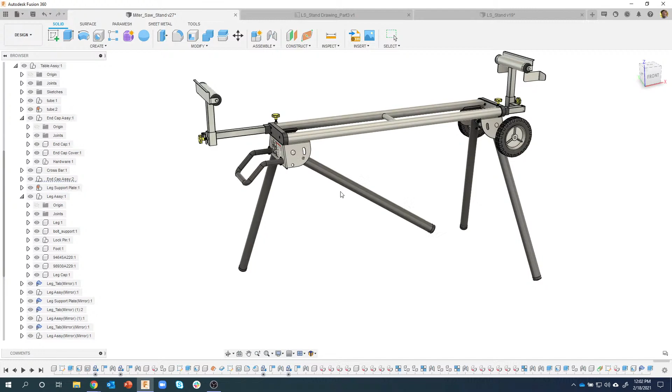We're going to continue today using the miter saw stand we've been working on. We're going to work on this leg assembly, specifically the whole leg. If I zoom in here, you'll see we've got some hardware - a pin that goes through here with a spring, and we're also going to work on this slot. The last live stream in this series, we created this sheet metal part, but we left out this slot, so we're going to show you some cool tips and tricks on how to do that.

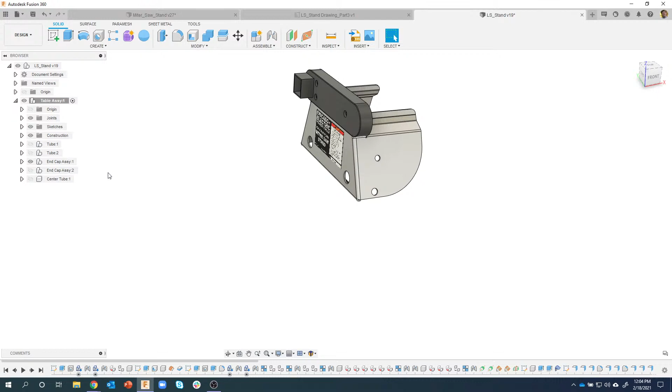I've shown in the past you can come into the assemble menu and say new component, or click on this icon and say new component. But my favorite thing to do is right mouse click in my structure browser where I want that component to be - I want it underneath this table assembly. So I'll right click and say new component. You can't really see what's going on, but this parent says one selected, so it knows the table assembly is going to be the parent, and this component is going to go underneath that.

So I'm just going to call it leg. Pretty unoriginal. Okay.

We'll create a sketch. Now in this design, I'm actually creating things out in space and then positioning them into the correct location later. So I just created a new sketch on the top plane. I'll create a circle out here somewhere - doesn't really matter where - and let's do 45 millimeters. Again, this is according to the drawing.

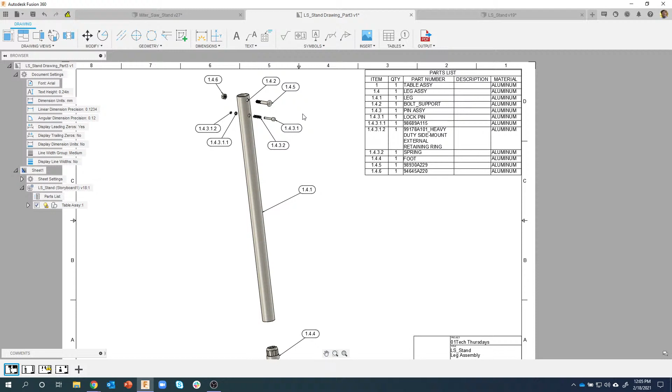So you'll see this is the drawing set - I have an exploded view. We're going to be creating this foot down here also today, and then I have a drawing of each of these. You can see here I forgot to dimension the diameter, so I'll fix that - I apologize, that's funny. And then we're going to do this pin, this lock pin, and we're also going to do this little foot. That's what we're going to be working on today.

Okay, so it's a 45 millimeter diameter. Then I'm just going to extrude this.

And I've shown this tip before - I could say finish sketch, but if I just click on my profile and right mouse click, I'm going to do this first extrude. The second extrude is a surface extrude, so you typically don't want to do that. So I'll do this first extrude, and you'll notice it finishes my sketch for me, so I don't have to click finish sketch and then click extrude. We'll go minus 820 millimeters according to the drawing.

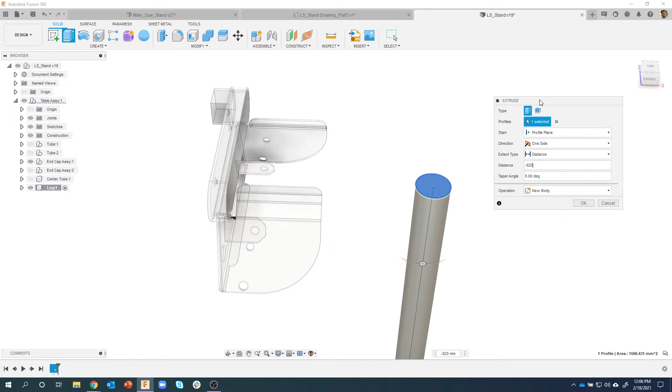Now we recently added this thin extrude, which I really like. So instead of having to shell this part out or create multiple circles in my profile, I can come in here and say I want to do a thin extrude, and it's going to ask for the wall thickness. In this case we're going to do 2 millimeters. When I say OK, it's like it shelled it out for me automatically, and I didn't have to select the top face and the bottom face like if I had used the shell command. So, cool little tip.

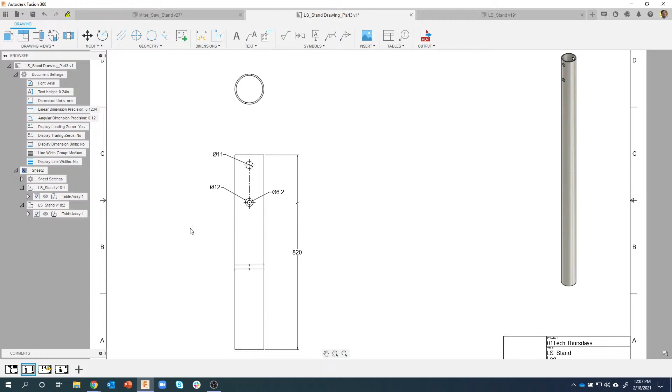Okay, the next thing I want to do - let's jump back to this leg - is I want to create these circles. And man, I realize I must not have finished this drawing. I didn't even dimension where they're supposed to be. Wow, I apologize.

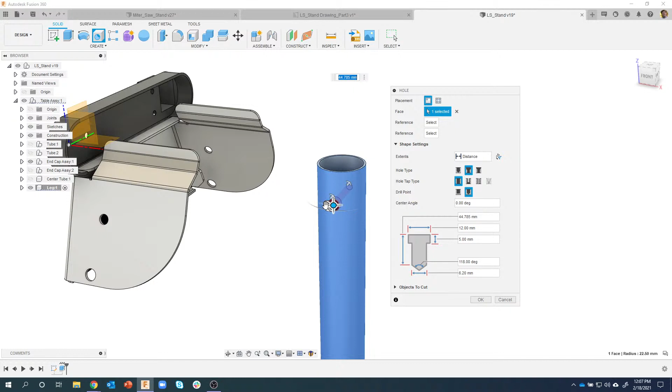Okay, so I'm going to create those two holes using the hole command. I really like the hole command, and here's why: you'll notice I'm not even going to create a sketch, and it's asking for a placement. If I get near the front of this and click off to the side a little bit, you'll notice it actually puts it tangential to that front plane.

So you can kind of see right there. Now if I were to have clicked off to the side a little bit more, over here, you'll see it's going to go tangential 90 degrees from that direction. So I don't even have to create an offset plane or anything like that—it just does it automatically, which I think is pretty cool.

Okay, so I'm going to just click somewhere on that face. The diameter of this top hole is going to be 11 millimeters. Then I'm going to reference this top face, and you'll notice as I hover over it, it highlights. So I'll go ahead and click on that, and it throws a dimension there—basically saying the center of this hole is going to be this distance from that top face.

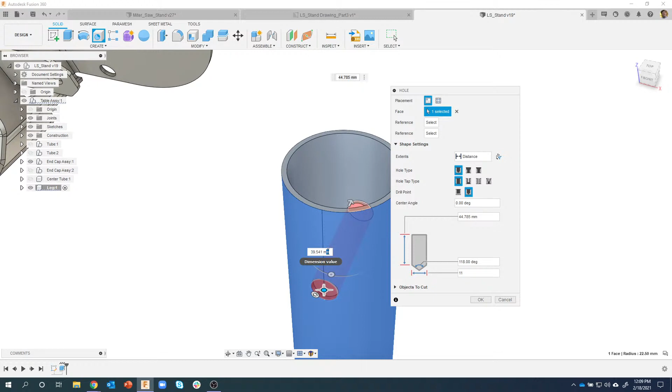Well, I want it to be 15 millimeters, so I'll type in 15, and you'll see that updates and moves that hole to be 15 millimeters from that top face. The other thing I want to do is make sure, instead of a distance, I'm going to just say go through all. In fact, I don't know if you saw that change ever so slightly.

Yeah, notice when distance was set, it wants to do an angled drill—let me look at it from the side. It just picked some random distance. But if I came in and said go through all, you'll see it's going to go all the way through. The drill point really doesn't matter in this case. And I'll go ahead and say OK.

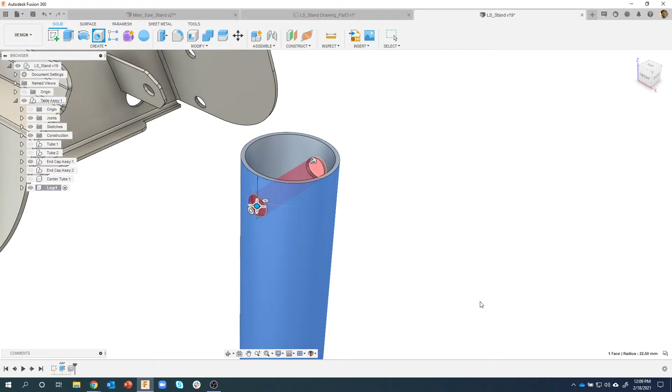Okay, I'm going to create the other hole. That was the 11 millimeter diameter hole. Now I'm going to do this 12 diameter and 6.2 diameter hole, all with the same command. I'll just right click and drag straight up to repeat my last command. If I right mouse click, you'll see this black line—that's called a gesture. Right click and drag up repeats the last command, which in this case was the hole command. If it was an extrude, it would repeat the extrude command, or a circle command, whatever your last command was. So that's how I did that.

Okay, so I'm going to click on this face again somewhere. I'll reference that top face, and this needs to be 71 millimeters down, so we can see that preview. Now, what I want is a larger hole in the front and a smaller hole in the back for this little spring pin to go through. I could do this with two separate hole commands, or I could change to this counter bore, which will allow me to give a diameter here and a diameter here.

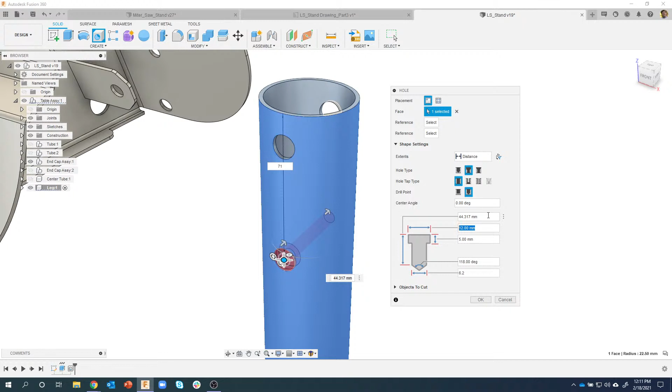So for the through hole, I want that to be 6.2 millimeters, and you can see how the preview updated—that got smaller. And here, this one is going to be 12, so that was actually correct. Then for the depth, I just need to make sure I'm going deep enough that it's cutting through the wall—you can see right here it's set to 5. I could set it to anything really, it doesn't matter, I just want to make sure it's cutting through that wall. And once again, I'm going to say go through all, that way it goes all the way through.

It kind of rotates funny because that's such a long part, but now you can see we're going to have a larger hole here and a smaller hole through the back. So I'm going to go ahead and say OK, and there we go.

Okay, so Al asked a question: can you ask Brad to show what the rotation handle on that hole does?

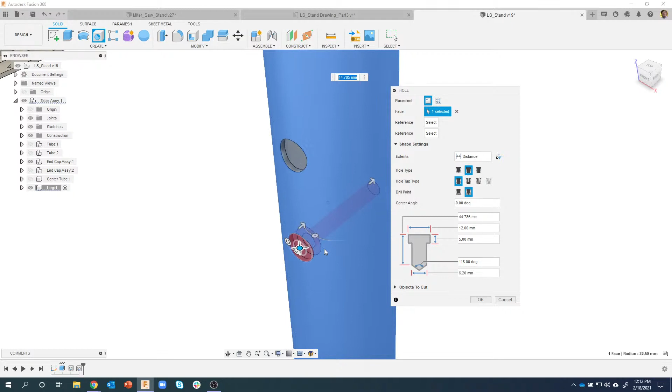So the question was, if I were to create a hole here - you can see it's kind of hard, it's kind of buried in here right now - but this actually allows you, by default, to start at that tangential face, or 0 degrees of angularity. I could come in here and rotate it to whatever I want.

In fact, I could come in here and say I want that to be at 45 degrees. Oops, sorry, that was the wrong one. Sorry, 45 degrees right here. So yeah, great question, Al, thanks for doing that.

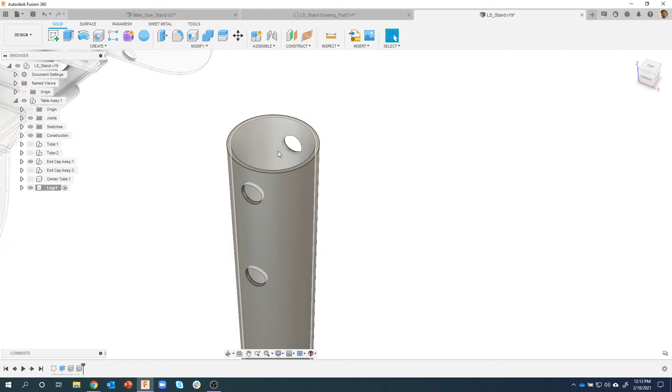Okay, moving forward. So I now kind of have the pipe the way it's supposed to look, but in the actual pipe there is an insert that the bolt goes through. So I'm going to create a new component under the leg.

Now you'll notice here we created this leg under the table assembly. You're going to notice I'm going to create some stuff under the leg because it's kind of all together. So I'm going to right-click here, New Component, and I'm going to call this bolt support. And I now have a new component underneath the leg called bolt support. This will just kind of help with organization.

So what I want to do is basically create an insert, a circular insert that's going to go right here. Now I don't have a flat face that I could create a sketch on or anything like that. So here's a neat tip for this.

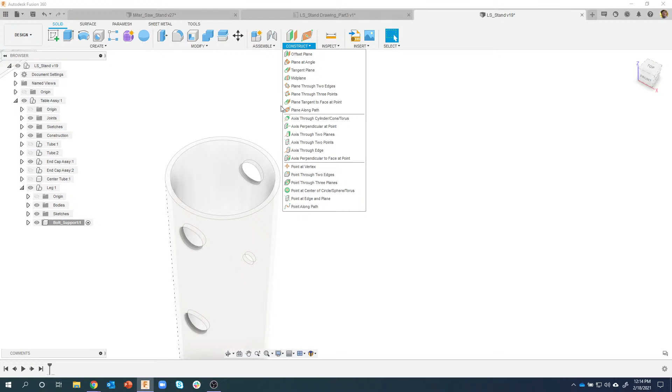I'm going to create a plane at an angle. Well, I don't want the plane on the outside here, I kind of want it through the center of my pipe. So I'm going to do an axis through a cylinder, cone, or torus. So what's the face? I'm just going to click on this face, and you'll see that it created an axis that goes right down through the center of that pipe.

I'll go ahead and say OK. Now you'll notice my axis is kind of long, and just like with a construction plane, if you get near the end, you can actually drag these points and make that axis line whatever length you want it to be.

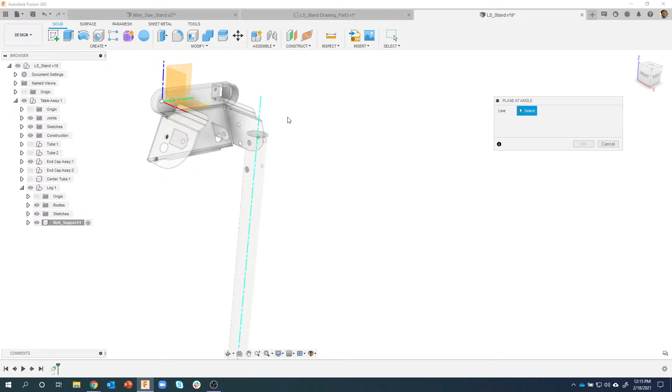Okay, then I'll come in and say I want to create a plane at an angle. Now you'll notice I'm just going to click on this axis, and it's going to put a plane through that angle, or through that axis point. I can also, just like in the hole command, come in here and rotate this and put this plane at any angle that I want. But in this case, I'm going to leave it default to 0.

And just like the axis line, I could grab the corners of these, because I really don't need the plane to be gigantic or whatever. So now I have a plane that slices through the center of that pipe.

Okay, now I can create a sketch. We'll go ahead and zoom up on this sketch. And I want to project, so P for project.

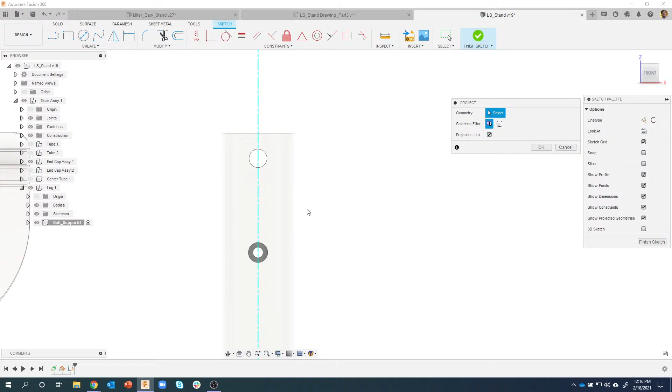And I want to project this cylinder. You'll notice I could come and click on these edges, but you'll notice how it's kind of split in half, for example. But if I hover over the cylinder, it's going to grab everything, including this hole down here and this hole down here. I'll say OK, and it's going to project that geometry for me.

Okay, now I can use this to create a circle. However, you'll notice that a center point doesn't show up because this isn't really a true circle, it's on a curved surface. But you'll see these blue snap guides appear.

So you can see it found one for the horizontal. Now if I just hover over this point, it's now going to find one for the vertical. And you'll see if I get near the center, it's now going to snap to that one and to this one, and I now know that's my center point. So kind of a neat little tip there using snap guides.

Okay, and I want to make this a 12 diameter circle.

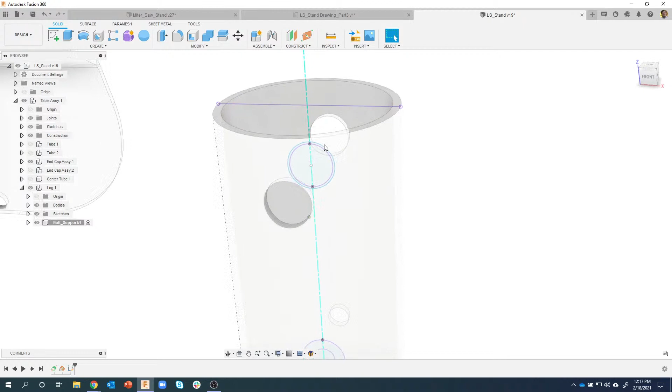And I'll finish my sketch. Now I'm going to extrude both of these features here, profiles I should say. And I'm going to say extrude. I like to start to drag to kind of see what that's going to look like.

Instead of a distance, we're going to say to object. And I'm going to click on that face, and you can see that it's going to extrude to that curved inside face. And that's kind of the key right there.

I also want it to be hollow because there's a bolt that's going to go through it. So I'm going to make this a thin extrude, and we'll do a 0.5 for the wall thickness.

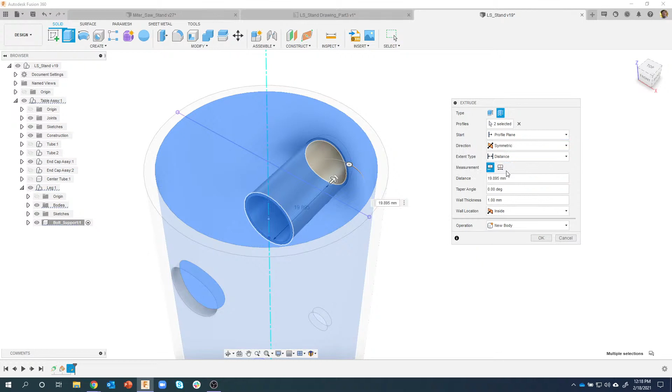Now, I showed this last time. I can't, well, let's try it. Let's do a symmetric. Yeah, you'll notice with symmetric it says distance, and so it won't follow that shape, right? It's just basically going in the same distance both directions. So I can't do symmetric.

Let's try two sides. Now this one does say distance, to object, and all. So let's try the to object, and I'll just click on that face, and that wrapped around. And then let's change this guy to object, and I'll click on that face, and you'll notice it doesn't really know which side. So this is the reason that I do the method that I do, which is a little bit more steps, two more steps.

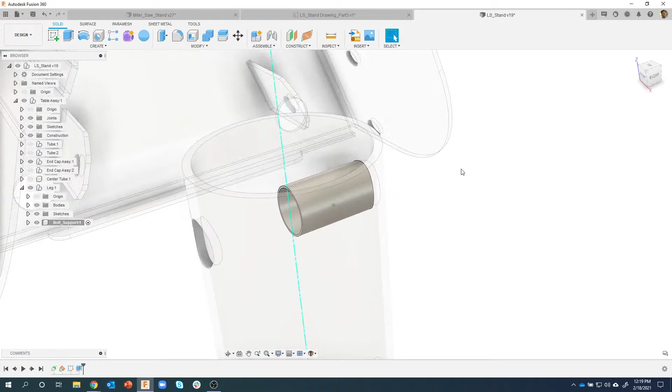But I'm going to come in here and just say one side, to object. The wall thickness is supposed to be, I'll set that again, 0.5. I'll say OK. And I now get this little insert, and you can see that it's going to fit perfectly. It's lined up perfectly, and this actually gets welded into place.

I think it was Ekram who made a comment in one of the previous videos: how would you weld that? In my example, it was the nut on top of one of the pipes. I'm actually not going to do that in the CAD system. When we get to the drawing set, we're actually going to use welding symbols and tell the manufacturer that this needs to be welded. So instead of me creating a bead around here, I mean, I could, but there's no need to, because the drawing is going to define how this thing is going to get manufactured.

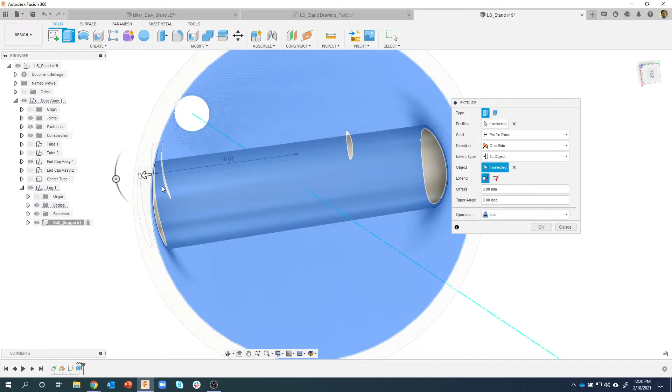Okay, so to get the other side of this, now I'm just going to click on this face and say extrude. And instead of distance, I'll say to object. And you'll see that it will extrude to the other side, and it's all one piece because we're joining it together. So yes, it's a two-step extrude to get that piece made, but it'll follow this shape.

Now, there's multiple different ways we could do this. I could have done a long extrude and then used the pipe to subtract that out, but then I'd have to remove the extra parts that were created. But there are different methods that you could use to create this exact same part, so I'm not saying the way I'm doing it is the perfect or exact way. It's just one of the ways.

Okay, moving on here. So we now have that bolt support done. The next thing I want to do is create the pin that's going to go through here. I'm calling it the lock pin because it's going to lock the leg into place through this hole that you see right here.

Once again, I'll right click on table assembly, and I'm going to create a new component. Now you'll notice I'm putting it under table assembly instead of under the leg, and I'm doing this on purpose because we're going to reorganize some stuff, and I want to show you, since I get the question a lot, what happens if I put it in the wrong spot. So I'm just showing you I can put it here. I'll say new component. Let's call this lock pin. And you'll see it created a new component called lock pin.

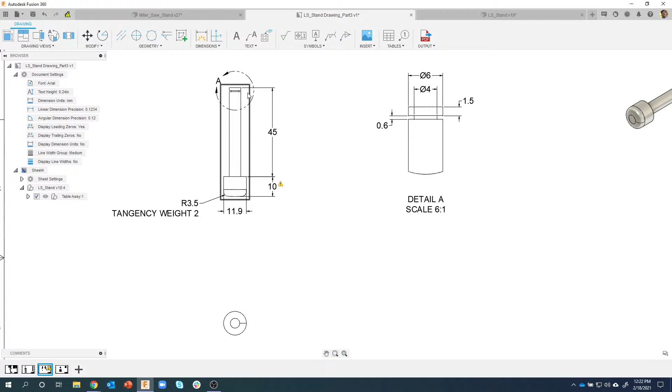And it's a pretty simple shape. If I zoom out here and go to the lock pin, it kind of looks like a cylinder and another cylinder with a little groove cut into it. That's what the final thing is going to look like. Now you'll notice on this radius, I call out this tangency weight of 2. We're going to see that here in just a minute.

And here's a detail of this little area right here. So we're going to be creating this part called the lock pin.

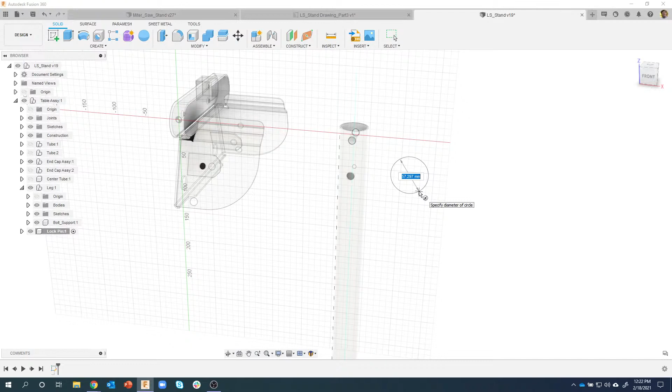I'm going to start with simple shapes. I could create a sketch, but instead I'm going to just use a cylinder primitive because that's kind of the shape that it is. I'm going to pick this front plane because it's kind of in the correct orientation, draw it out in space somewhere, and make this 11.9 in diameter and 10 millimeters in height. You can see right there 11.9 by 10.

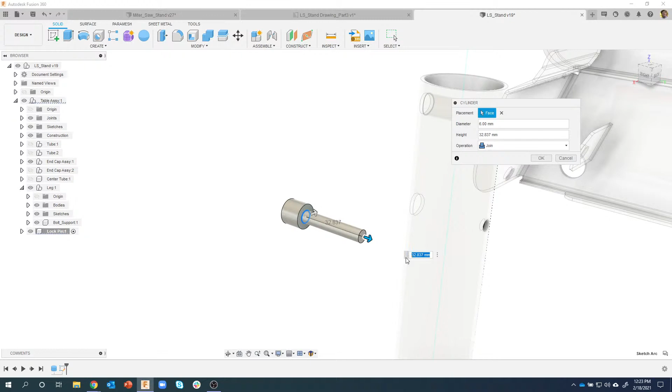I'll say OK, and now I'm going to create the smaller part of it. I can come over here to cylinder, or right click and drag straight up, and it's going to repeat the cylinder command for me. I'll pick there, and the diameter for this is 6, and the height I can drag to visually see what that's going to look like. I can type in 45 for the height. So that's kind of the basic shape, and this is all one body.

It created one because the other one was touching it, it joined it together, we can see that right here. I could have created a sketch, drawn a side profile, done a revolve, totally could have done that. Could have drawn a sketch, did an extrude, created another sketch, did another extrude, totally could have done that. Multiple different ways of doing this, but I think the primitives are pretty fast.

Okay, so the next thing I want to do is create that fillet on the end, and this is pretty cool. I'm going to right click on that edge and say fillet, and I'm just going to do a standard fillet. Let's think it's 3.5 according to the drawing, and you'll see that it rounds over that edge. But you'll also see right here we have this tangency weight.

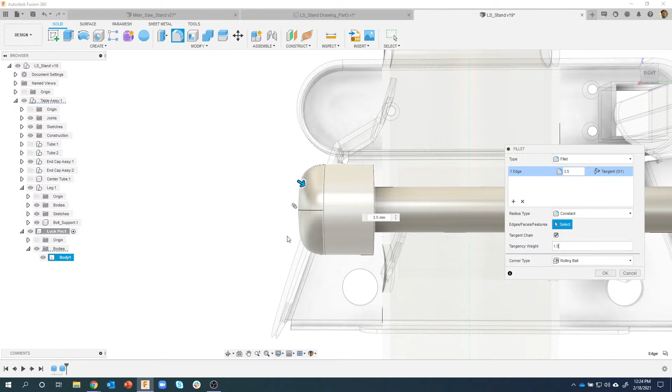Watch what happens when I type in 2. It's a little bit flatter, and then it starts to do the fillet. Let's go back to 1 so you can kind of see what it originally looked like, so it's more of a curve. This tangency weight allows you to control how soon this fillet really happens. So there's 1.5, there's 2, and you can kind of see as I'm going through here the differences that I'm going to get.

Let's try 0.5 for example, and you can see how it starts to curve really, really fast versus 1, we get a nice transition. So that's what this tangency weight does for you. I'm going to make it 2, and it kind of makes the front of it a little bit flatter, but it still has a curved edge on it.

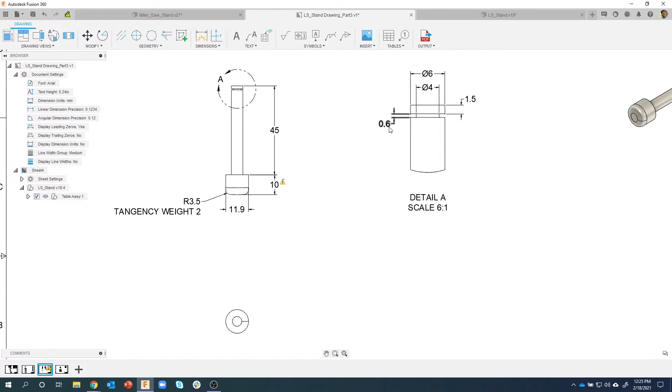Okay, now I want to create this groove. Some of you might be like, well, okay, you could do a revolve, draw like a rectangular profile and revolve that around. Again, multiple different ways of doing this. What I'm going to do is create a sketch on this face.

Draw a circle, so C for circle, and I'm going to draw that inside diameter. Actually, you know what, I lied, I'm going to back up a little bit. I'm going to put this part in the correct location first, and then I'm going to do that groove. I'll show you why here in a little bit. It really doesn't matter, but I think it's more visual to see where it's going to go.

So I created the fillet on there. Now I'm going to position it where I want this to go. Pay close attention here because you're going to see some interesting tips and tricks on how I could position this guy. I'm going to come in here and say joint. Now, which one do I want to move? This part. And where do I want to move it to? That's how I remember. I want to move it to this part over here.

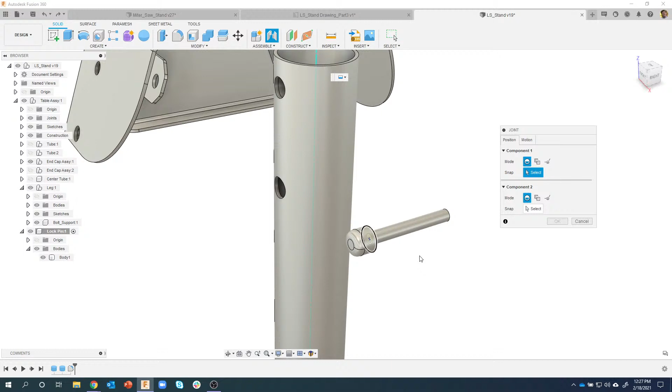But this is like a curved surface, that's going to be a little bit difficult. Well, I kind of want the middle of this head to be kind of in the middle of the hole right here. So check this out. I'm going to hover over the cylindrical face, and you'll notice it gives me a start, a middle, and an end. In fact, if I look at it from the side, it'll make more sense. It's kind of hard to see, but there's my start, there's my middle, and there's the end.

Okay, so I'm going to grab this middle.

So I just grab the middle of this cylinder right here, then zoom up on this hole. As I get near this edge, this is not where I want the pin to be. None of these locations are correct.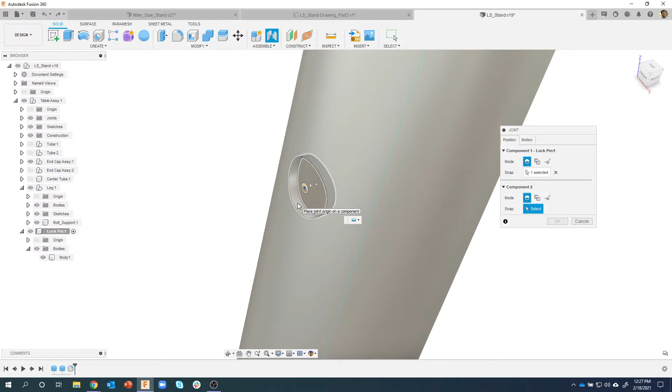If I hover over the circular face, you'll notice it has a start, a middle, and an end. You can think of this as the outside edge, this one as the inside edge, and the middle one as right in the middle. So I'm going to click there, and it brought the middle of this cylinder into the middle of that hole, perfectly centered.

Hopefully that makes sense. I'm just showing those joint origins. It really gives you a lot of control, where you can say go from the center of something to the center of something else. If you need to, rewatch that part of the video.

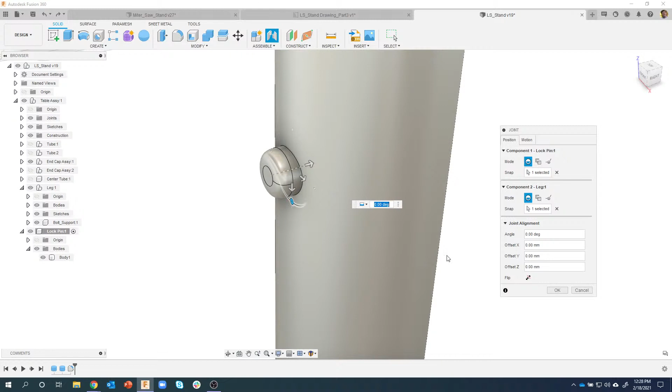Now I'm going to change this into a slider, because this pin kind of pushes into the pipe. I'll go ahead and say OK, and I now have that pin where I want it to be. Here's why I decided to wait to do the groove afterwards, so you can see what that's going to look like.

Okay, the next thing we're going to do is create that sketch. My lock pin is still my active component. I'll create a sketch, and do a small circle here, 4 millimeters in diameter. Then I'm going to say I'm done.

Now you're thinking, well, that profile's on the wrong face, it's in the wrong location. Well, check this out. I'm going to grab that profile and say extrude. If I start to go like this, sure enough, it's going to use that profile and cut that geometry away.

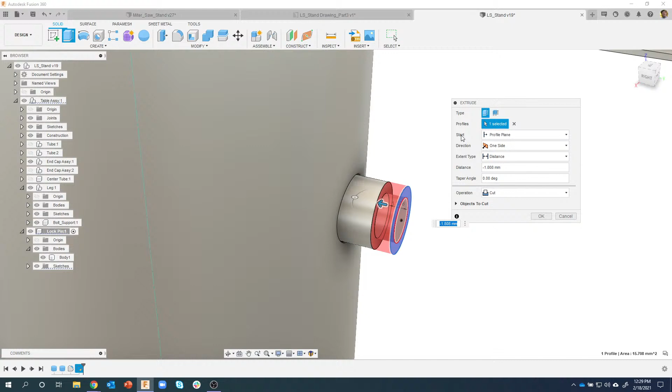But I want it to start in a different location, and that's where this start is right here. So I'll change that from profile plane to offset, and now I can specify the offset, which is 1.5 millimeters. Now you can see it's taking this profile, moving it 1.5 millimeters, and then doing the extrude cut.

And in this case, it needs to be minus 0.6 in thickness. Hopefully you can see what I did there. I left the profile on this face, and then we just told the extrude to start in a different location and extrude the correct depth.

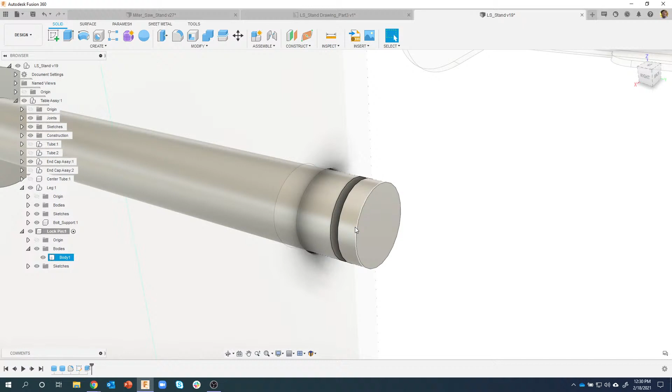Once again, I find this a little bit easier than having to create an axis, then create a plane through that axis, then draw a rectangle, dimension it to the correct location, and then revolve cut around. That would take more steps than just one, well, more like two, I should say. The profile and the extrude, basically two steps.

Again, multiple different ways of doing this, but I like this method.

Okay, so I now have my pin. We've got this little groove for a C-clip to kind of hold this thing into place.

I want to put a washer on here. So let's see, I want to make sure I activate my leg assembly. Okay, then I'm going to insert a McMaster-Carr component. So instead of me drawing a washer or whatever, I'm going to let McMaster-Carr do the work for me.

So in the outline and in the drawing, I have the part number. You could come in here and go to washers and filter through all of this, but I like to type in the McMaster-Carr number. So I'm going to do 986, 89 alpha, and then 115.

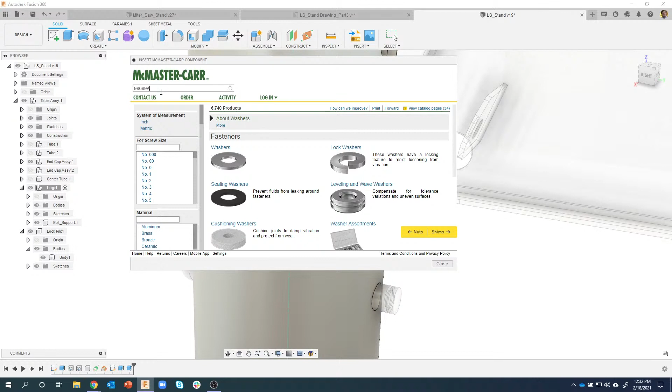When I search for that, you're going to see it automatically finds that for me. So we can see, if I scroll up, it's a metric general purpose washer. It's a metric 6, you can see it right here, stainless steel, blah blah blah. So by searching for that number, it brought me right here, and I can click on product detail.

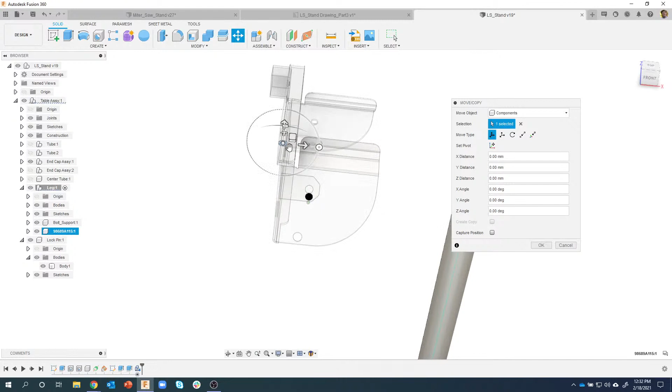I want the CAD file, I'm going to do a 3D step file, so I'll just say download. And it's going to bring that into my 0,0,0 location, my origin, which is kind of far away from where it needs to be. So I like to position it sort of where it needs to be.

Now it doesn't have to be exact, it's just in the general area. So I'll go ahead and say OK.

And then I'm going to create a joint. So I'll say joint, and you'll notice it says some components have been moved. Capture the current position or continue in the previous. If I said continue, it would actually move it back to that 0,0,0 point. So I'm going to capture the position here, and it captured where it was, and now I'm creating a joint.

So I'll say maybe this edge or that edge, it really doesn't matter. And then once again, I'm going to grab the edge of this circle, but you'll notice that would give me a wrong result. I need this little joint origin to be up and down.

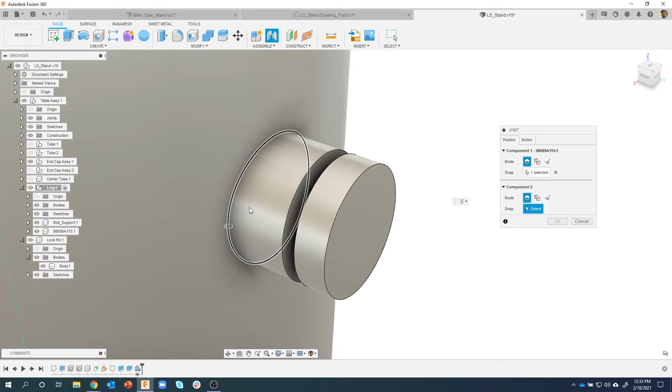So let's turn off the lock pin and hover over this face, and now we can see, sure enough, there's the front edge of this hole. So I'm going to click there, and you'll see that it's going to bring the washer. Now it remembers my last motion type was a slider, so I'm going to say rigid, and we can see that the washer is now perfectly flush and centered with that hole, because I grabbed that outside origin point of the hole along this edge. Hopefully that makes sense.

Okay, I'll turn the pin back on. So we now have this little washer. The next thing I want to do is bring in that little C clip. So same thing, I'll insert a McMaster Carr component.

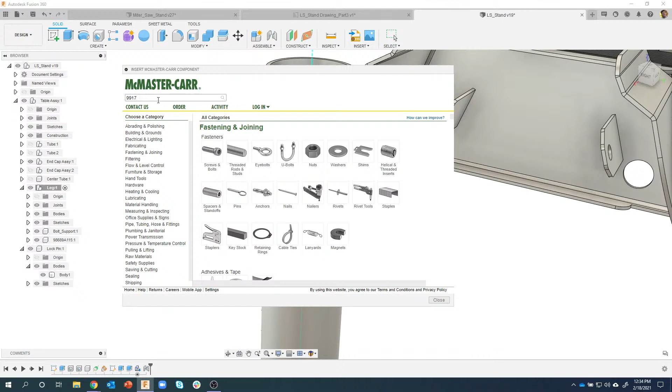And I'm just going to search for the part number, and in this case it's 9917, 8 alpha, 101. And sure enough, it found this.

I'll scroll back up so you can see this external retaining ring. Think about how much time that would take for me to model that, to draw that, but it already exists out here, and it's the right size. I'm just going to go ahead and click on that and say download.

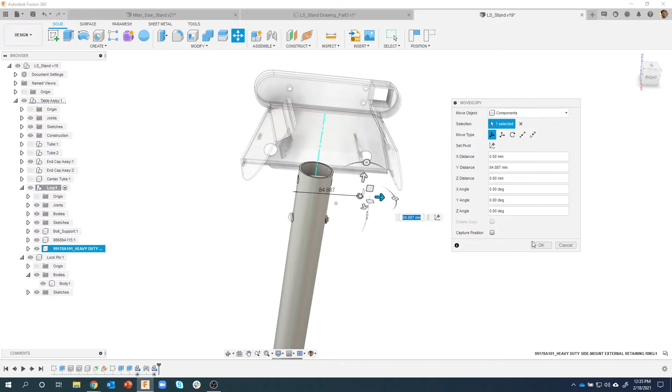Now I'm going to show you a neat little tip. Remember last time I said it brought it in at 0,0,0, and I kind of positioned it close to where it needs to go, and then I said okay. Notice in here there's a capture position, so I could just click on that and say okay, and now it's not going to complain at me when I go to do the joint command. You'll notice it didn't say parts have been moved, do you want to capture or continue. So you can save a step by clicking on that capture position when you insert the McMaster Carr component.

Now I want this to be in that little groove right there. So I'm going to hover over this circular shape right here. I could grab any of these edges, it really doesn't matter, and you can see it's going to create that little origin, that little plus symbol right there. So I'm going to click on that, and it captured the center of that. And then I'm going to click on that edge there, or that edge there, it doesn't really matter, and then it's going to position that clip.

Now, as I look at this, it doesn't look all that great, but I can click on this flip, and you'll see that it's going to flip from being on the wrong side to being on the right side.

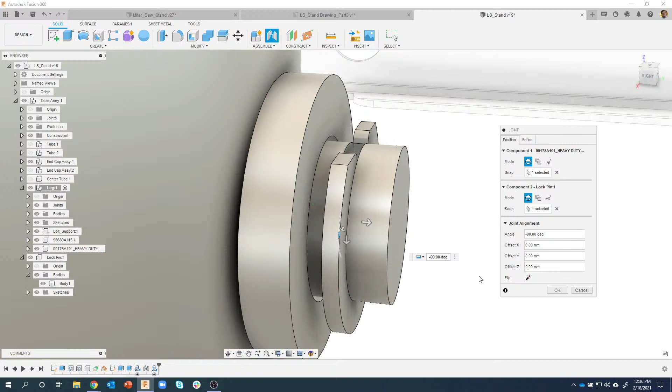And to answer Eyal's question about the rotate, you can see the clip is like that. Well, now that it's in place, I could come in here and rotate this to any direction I want to make it a little bit more random. Now, I usually keep them kind of orthographic, so when I'm doing a drawing it makes a little more sense, less hidden lines or something like that. But again, it's totally up to you. For example, if you were to insert a bolt with the bolt head, you could rotate that bolt head around so they're not all pointing in the exact same direction, to add a little bit of realism.

So, okay, we'll go ahead and put that clip like so.

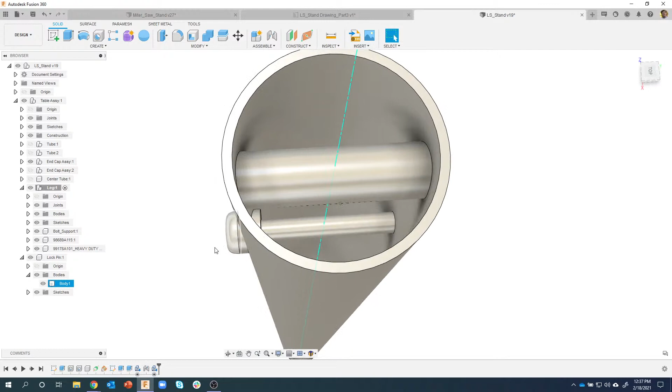Now the last thing we want to do is there's actually a spring in here that's trapped by the inside of the pipe, and what this allows us to do is we push this little pin in and it's going to allow us to rotate the leg around. So we need to create a spring.

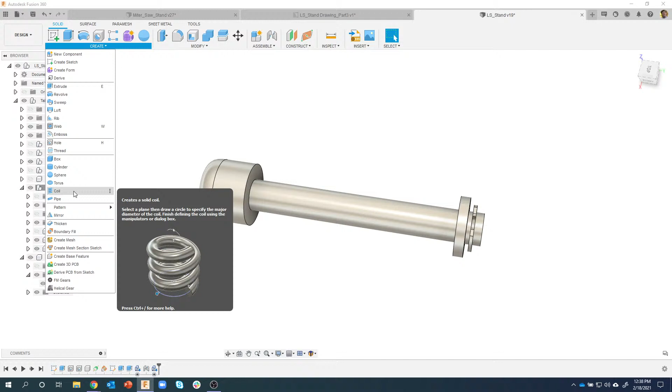Now I could grab one from McMaster-Carr and bring it in. I could totally do that, but I wanted to show you this coil command. So let's turn the leg body off and the bolt support off to kind of simplify things. I'm going to say create coil. Now before I do that, it's going to be a part, right? So I want to make a new component. I'm going to right click on leg, new component, and let's just call it spring.

Now we're in the spring component, and anything I do will get captured in that component. So I'll say coil, and it says select a plane or planar face. I'm going to click on this face right here. Then it says place a center point, and you'll notice that it's actually catching to the center. Let me make it a little bit more isometric. It's catching to the center of this face right here.

Now it's asking for a diameter of the spring. So I'm going to type in 6.2. You'll notice it gives me just a little bit of clearance, and I'm going to hit enter. It gives me a preview of what this is going to look like. Let me try default here. Usually it'll look something like this, I think it's like 2 or 3 coils or whatever.

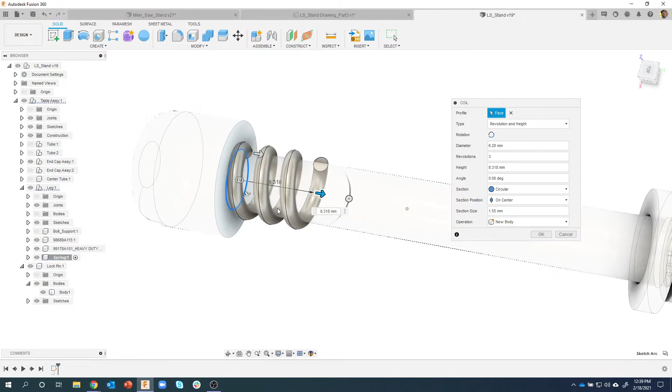And you'll notice that these coils are kind of intersecting with this pin. Well, the coil command has a lot of options in here. I'm not going to spend too much time, but you can see revolution and height - so how many revolutions and how tall is the spring. I can go revolution and pitch, height and pitch, or I can do a 2-dimensional spiral. I'm going to leave it revolution and height.

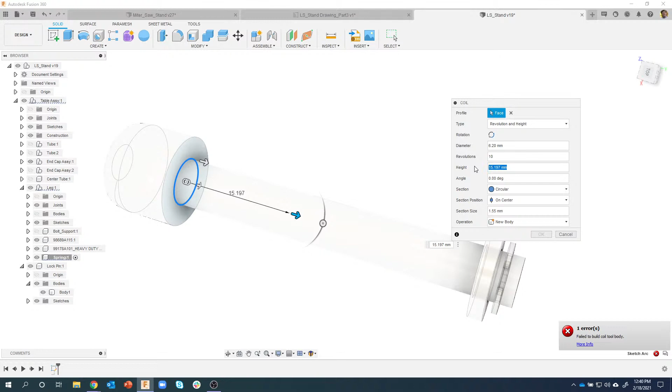How many revolutions? Well, I want it to be, in this case, let's do about 10 revolutions. And you'll notice I get an error message, failed to build. Well, that's because of the height. Watch what happens when I start to drag - as soon as it can get 10 coils in there, it will, but they can't be overlapping. If our height isn't tall enough, they would intersect, that's not good. So if you ever get that error message, just keep filling out stuff. I'm going to say 38 in this case, and there we go.

You'll notice it says section is circular - we could do square, different shapes, but obviously in this case I'm going to do circular. And then this section position, it says on center. Well, I'm going to say outside, so it's going to put the coil so it wraps around this diameter right here, the 6.2 diameter. Or I could come in here and say on the inside. You can kind of see how it's following this blue circle - it's on the inside of that blue circle, on the center of that blue circle, or on the outside of that blue circle. And that's what I want.

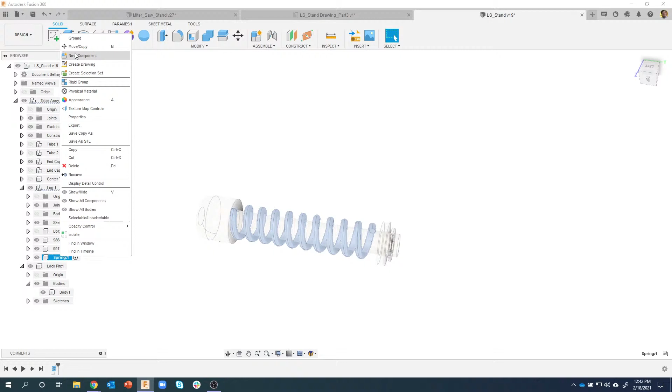So 10 revolutions, height of 38, I'll go ahead and say OK. Now the drawback with this is we started it on this face, and so you can see that it's kind of self-intersecting, that point right there. So I'm going to right click on the spring and just say move.

Let's translate it to the right, and so you can see we can slide it along this pin. Let's just move it to the right, maybe about 1 millimeter or so. Let's see if that looks good. Yep, that gives me some clearance there. I could even do maybe like 1.5 - nope, too far. So whatever works, 1.2, 1, I don't care. Let's go ahead and capture that position. Okay, so zoom back out.

Let's turn our bodies back on. We now have this leg with the pin, the spring, the washer, and the clip that's going to kind of hold all of that together.

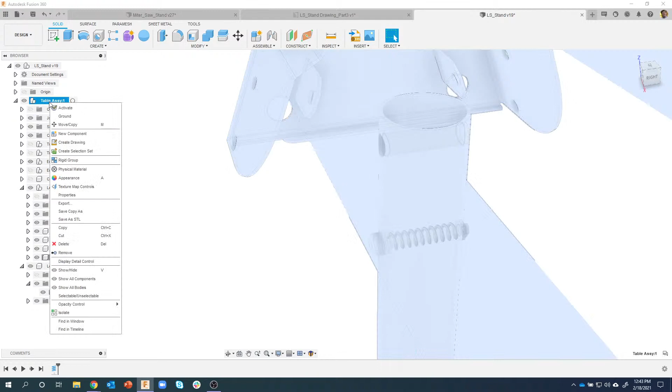I was trying to simulate what might happen in the real world for you. So we're going to create, under the table assembly, a new component, and I'm going to call it pin assembly. There it is. And now I'm going to drag the lock pin, the spring, and these two washers and clips into my pin assembly.

So I'm just grabbing those, and you can see this little blue bar appear every once in a while. I'm going to drop it on top of pin assembly. And now we can see that this is all one sub-assembly, not one component. It's an assembly with all of our stuff inside of here.

So here's my lock pin, here's my spring, here's the clip, and there's the washer. So it's a really cool way to organize how things should be together, kind of like sub-assemblies, sub-sub-assemblies, etc. In fact, I'm going to create another assembly.

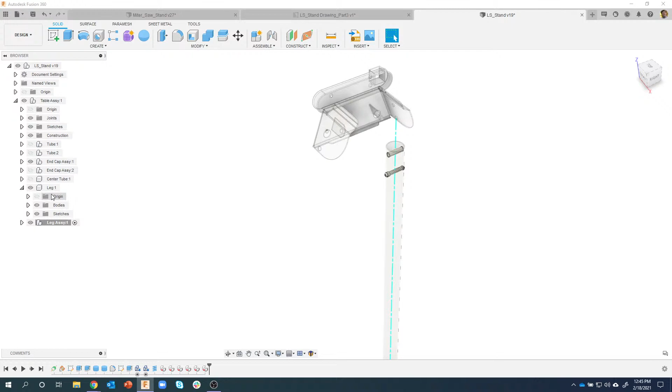So I'm going to say new component. Let's call it leg assembly. There it is. I'm going to put the pin assembly in there. I'm going to put the bolt support in there. And I'm going to put the leg in there.

And now we can see, under the leg, if I turn that on or off, everything turns on and off. There's my pin assembly, which you can kind of see as a sub-assembly of it. And then there's that bolt support part, and then there's the actual leg itself. So kind of a cool way of organizing things.

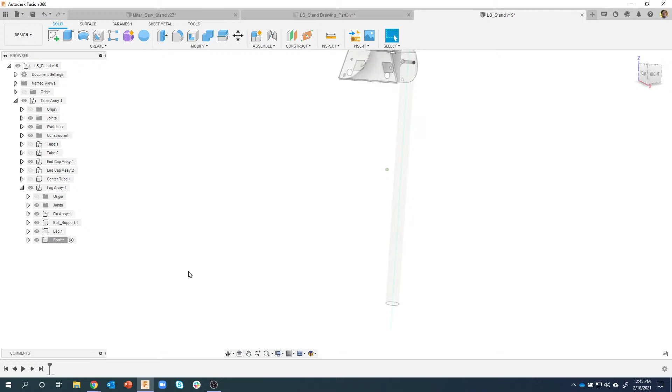So the last thing I want to do on here is create that foot. So I'm going to right mouse click on my leg assembly and say foot. I now created a new component called foot. Pretty repetitive here, so I'm going to go at a pretty good pace.

I'm going to draw it on this top view, again using dimensions from the drawing. So this is 40.5 - I'm sorry, I lied, 45. And it's going to be 20 tall. So we're now looking at the foot. Here's the 45 by 20 tall. That's what we're doing there.

I'm going to do the same thing. This is going to be - I'm sorry, we did the 45 by 20. Now I'm going to do the 40.5 by 27. Okay, so I will zoom up. We'll repeat my cylinder. This is the 40.5 by 27. Okay, so there's kind of the basic shape of the foot.

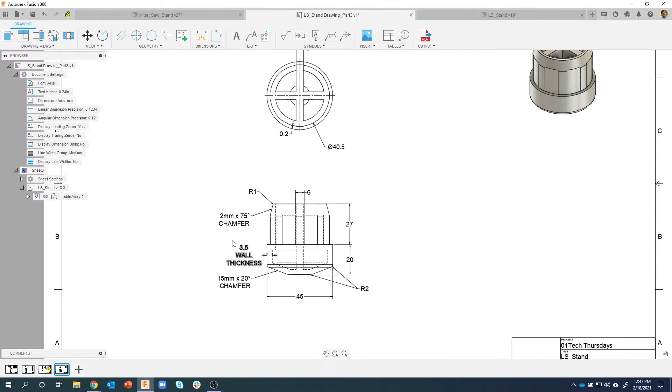Then I want to create these angles here. So I'm going to use a chamfer, and you can see it says 15 by 20 degrees and 2 by 75 degrees. So how do we do that? Well, I'm going to click on this edge, say chamfer, and by default it's set to equal distance, so it's going to be basically a 45 degree chamfer. But if I go under this type, I can say two distances, or I can say distance and angle.

So on this bottom one, it's supposed to be 15, but the angle, instead of 45, I want it to be shallower, so I'm going to say 20, and you can see how that is now 15 by 20.

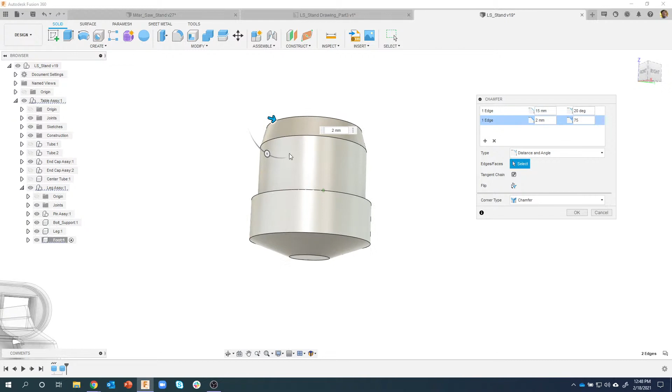And then this is cool - I can add another selection to this, so I'm going to click on that plus. I'll click this top edge, and it knows that it needs to be a distance and an angle, so we'll do, again according to the drawing, 2. You can kind of see the preview of what that looks like, but it needs to be steeper, so I'm going to say 75. I'll say OK, and we now have one chamfer feature in the timeline that's actually doing two different size chamfers.

I'll fillet these bottom edges. Those are supposed to be 2 millimeters, and this top edge is supposed to be 1 millimeter. So again, just like in the chamfer, I could come in here and say add a new selection. Let's do that guy, and let's make him 1. So you can see we've got two edges at 2, one edge at 1, and the fillets that kind of define the shape of this part are under one fillet feature.

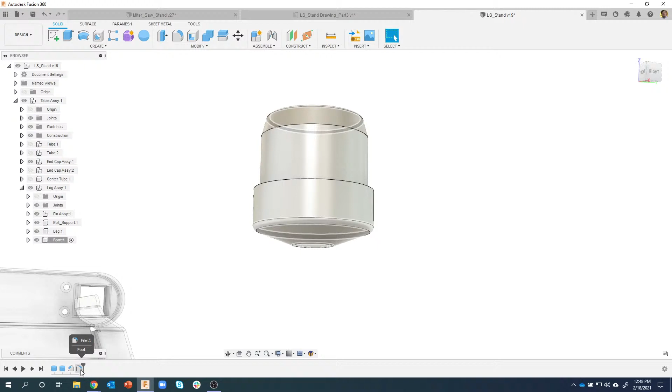The next thing I want to do is, you can kind of see here, it's got these support ribs on the inside, and it's shelled out. So let's shell this guy out first. I'm going to click on that top face and say shell. As I start to drag, we can see a preview of what that's going to look like. It's basically shelling out the inside of the part, and the wall thickness is supposed to be 3.5 according to the drawing. So I'll say 3.5, say OK.

Now I want to create those cross member things. So I'm going to zoom up a little bit. There's a flat face right here. I'm going to create a sketch. And then I want to project. P for project. I want to project that flat face right there.

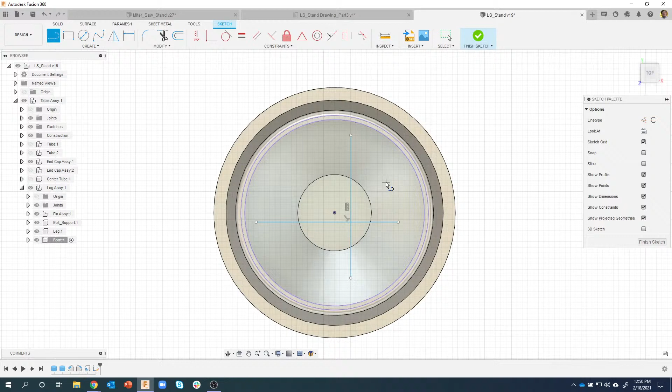And the reason for that is we're going to use the web command, and all the web needs are a couple lines. So I'm just going to draw a couple lines like so. I'll do a line like this, like so. I can see that those are horizontal and 90 degrees with each other. Well, I want these points to be touching that edge. So here's a neat little tip. I could come in here and say coincident, click that point and click that edge, and you'll see that sure enough it jumped over there.

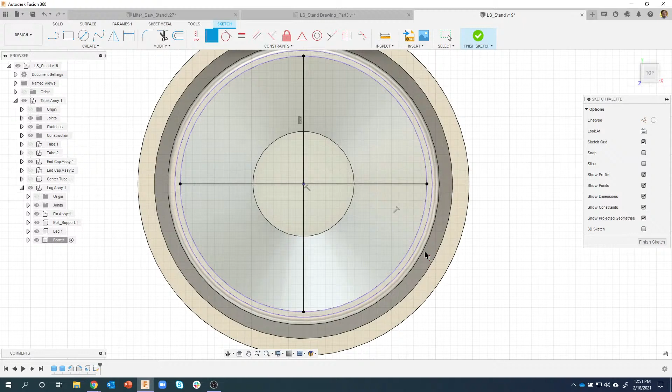And so now that line is coincident with that edge. Well, instead of actually having to do the constraint, I can just grab the point, get it near that edge, and you can see like a little X show up, and it's going to create that coincident constraint for me automatically. So as you see, as I'm dragging, those points are staying touching that edge. If you're comfortable with this, you can just drag these across, and it knows that those are now coincident points. The last thing is I want to make sure that they go through this point right here, that line there and that point right there. We can see that they turn black, meaning that they're constrained. I'll finish my sketch, and those lines are perfectly going through the center, and they're touching that edge.

Then I can come in and use the web command. Really powerful command. What are the profiles? I'm going to say that guy. You can see we can change the thickness here. I'll add that edge in there also. And you can see how it's going to actually, it's kind of hard to see, but you can see it's wrapping down underneath that taper right there. It's pretty amazing how this works. Those are 5 millimeters thick. We'll say okay, and we've just created this internal support for the foot.

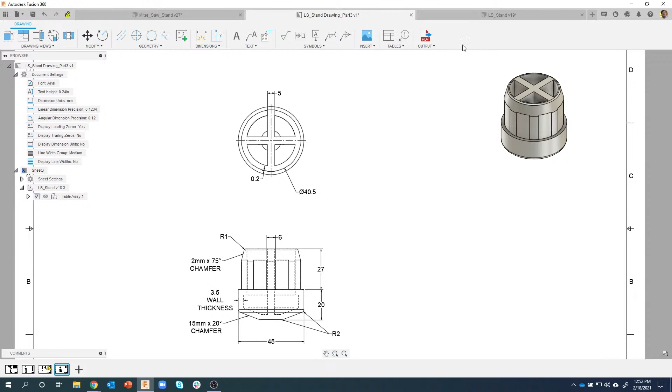So the next thing I want to do is there's all these little tiny ribs on the outside, and this basically allows it, when it gets pushed into the leg or the pipe, it kind of creates tension on that and holds it in place. So I need to create a profile, and we're going to use the emboss command, but I need to have a sketch to draw on. I like to have it kind of near the part. So I'm going to come in here and say offset plane. And I'm going to pick one of these flat faces. It really doesn't matter which one, honestly. I'm just going to pick this guy.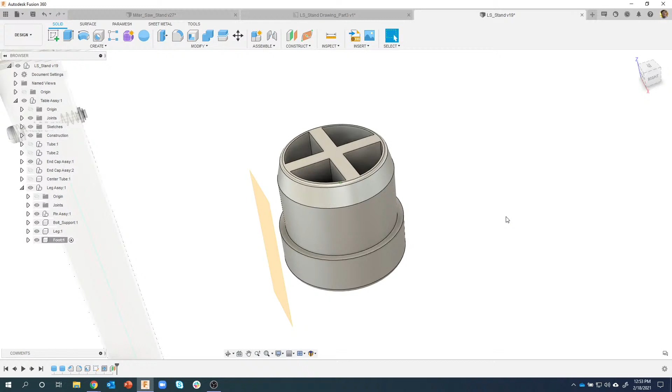And I'm just going to drag this plane so it's sitting in front of the foot. Again, I don't really care what this distance is. I could come in and say make it exactly 30 millimeters if you wanted to, but you honestly don't have to. So I now have a plane I can create a sketch on. And again, because my foot is active, all of my features in the timeline are underneath this foot. Let's project that face there, because that's where the sketch is really going to go. So I just projected that face. You can see these purple lines. Then I'm going to create a rectangle, and I'm going to use center rectangle. And what this allows me to do is, as I get near this line and get kind of near the center, you can see it snap automatically to the midpoint. So I'm going to click there, and you can see that it's going to create a rectangle.

And I want to catch down here also, but I want to be very specific in the width. So I'm going to tab to the width and type in 6. Then I'll hit tab again, and we've locked in that width. So no matter where I move my cursor, we can see that that width is locked in.

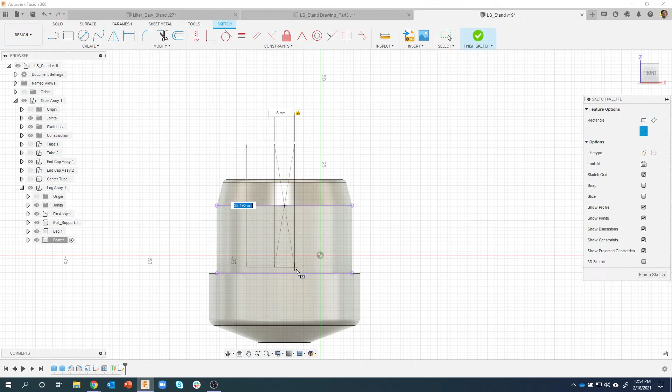Now all I need to do is come down, and you'll see it snap to that bottom edge, make it coincident with that bottom edge, and I'm actually done. Now, you might be saying, well, that rectangle is way too tall. You only need it to go right through here. And yes, that's correct. But by using the center rectangle, it was much faster. I know it's perfectly lined up. I didn't have to add a whole bunch of dimensions.

And you'll notice there's my profile right there. It's because it's being split by that line right there. I don't even care about that profile. So we'll come in here, we'll say emboss. What's my sketch profile? That guy. What's my face? That one there. By default, it's usually a little bit thicker, like so.

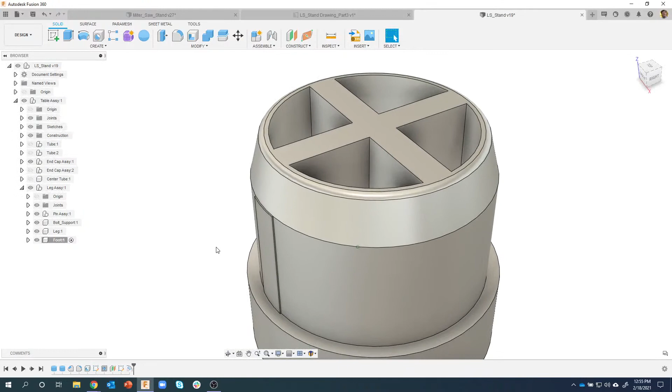You can kind of see the preview there. According to the drawing, the depth is 0.2. So I'm going to say 0.2 and say OK. So we just embossed, so it follows that curve, which is really cool.

But I don't want to have this little sharp edge right here as it's being inserted into the pipe. So check this out. I'm going to click that edge, say chamfer, and we're going to do that distance and angle again. And it actually remembers your previous entries in here. So I could come in and say I want that to be 0.2, and it remembers that. I could come over here and it remembers all the different degrees that we did. So I'm going to say 75. And you can kind of see how it basically joins with this existing chamfer. So another neat little tip, if you just click those little down arrows, it remembers your previous entries.

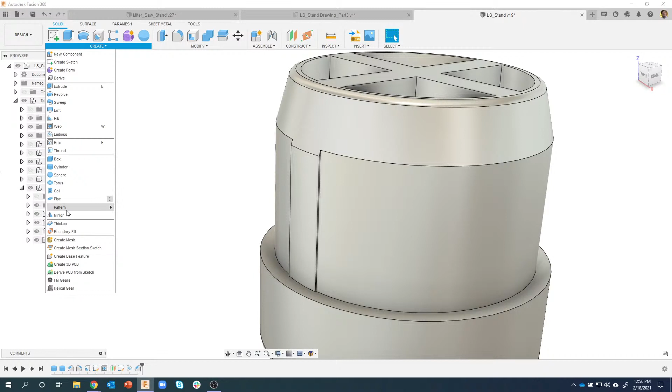Okay, so I now have one of these. And I want it to go all the way around. So we'll say pattern, circular pattern. Sometimes by default it's set to faces. Please don't use faces unless absolutely necessary, because think about how many faces I'd have to select and I'd have to zoom in or whatever. Instead, I'm going to change it to features.

I want to pattern the emboss feature, and I want to pattern that chamfer feature. So it's going to take this emboss and pattern it around. And it's going to take that little chamfer and pattern it around also. What's my axis? I could click on an edge. I could click on a face. It really doesn't matter, honestly. I'll say that. Let's do 8 of these. I'll say OK.

And there is our foot. Literally looks like about maybe 10 features. I could have done this as a revolve. I mean, there's many different ways. I could have drawn and extruded down. I mean, there's many different ways you could create this. Okay.

I'm going to change the appearance of it really quick just to make it a slightly different look and feel. So I'll just do this black textured plastic. And the last thing I want to do is put it where it belongs.

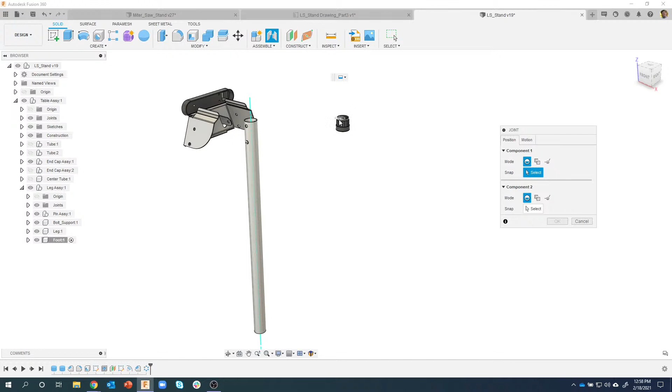So I'll say joint. In fact, so here's another little tip. I'm going to create a joint. I like to do the joint kind of at a higher level. So instead of having it show up under the foot, I might put the joint under the leg assembly. In fact, you'll notice there's these joints right here. So instead of having them kind of hidden in sub-assemblies, etc., I'm going to activate my leg assembly, create the joint. I'll say maybe that circular edge with that circular edge, and it will position that foot right where it needs to be.

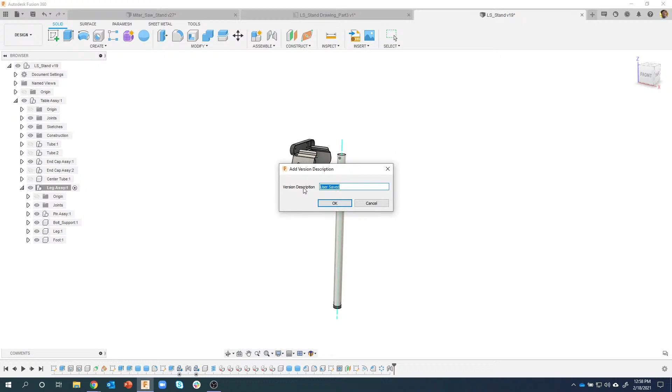I'm going to go ahead and save. I'll call this live stream session 3.